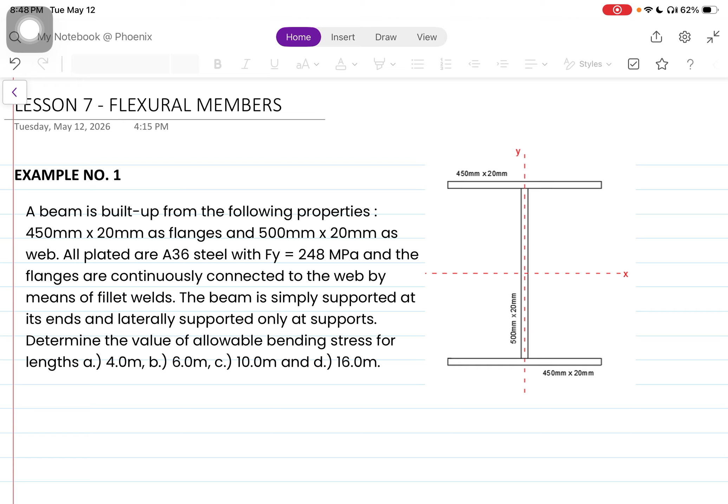This is our built-up section. We have 450 by 20 mm for the two flanges, one on top and one on the bottom. And we also have the web as 500 by 20 mm.

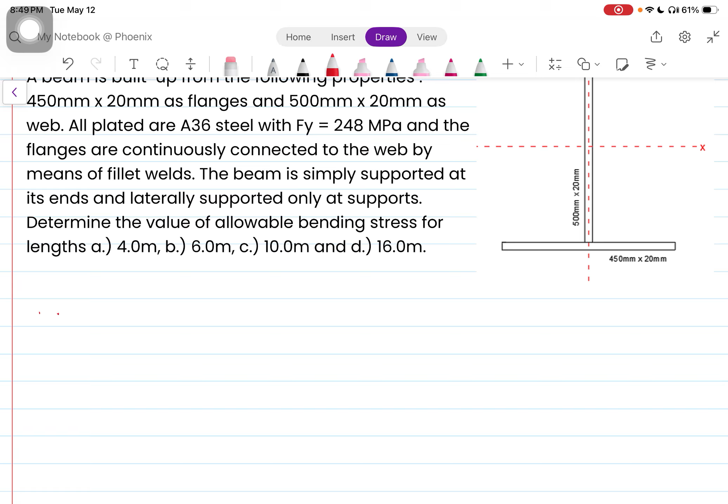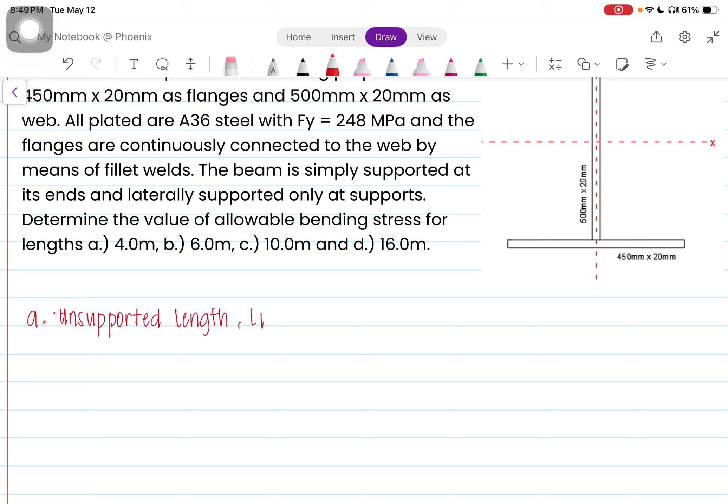So first, let's start with our first case. The unsupported length, Lb, is equal to 4.0 meters, or let's use it in mm, 4,000 mm. So what is our first step?

The first step is the compact check. Let's do the compact check first for the flange.

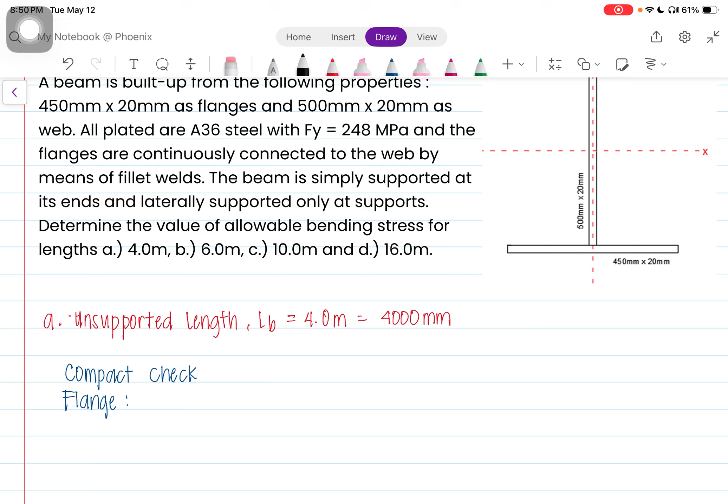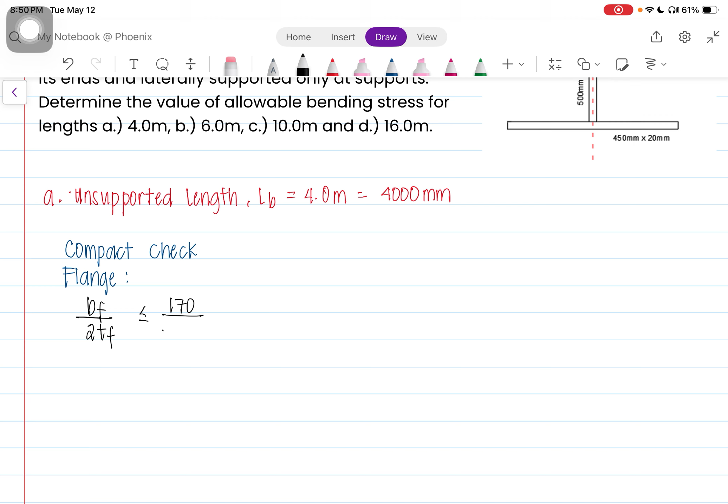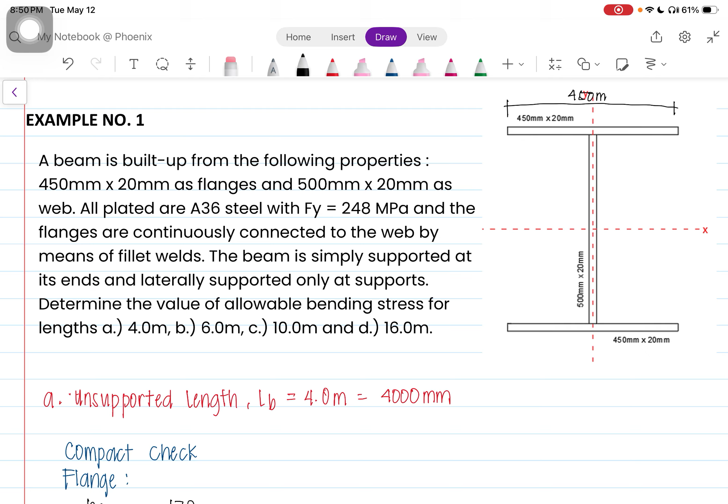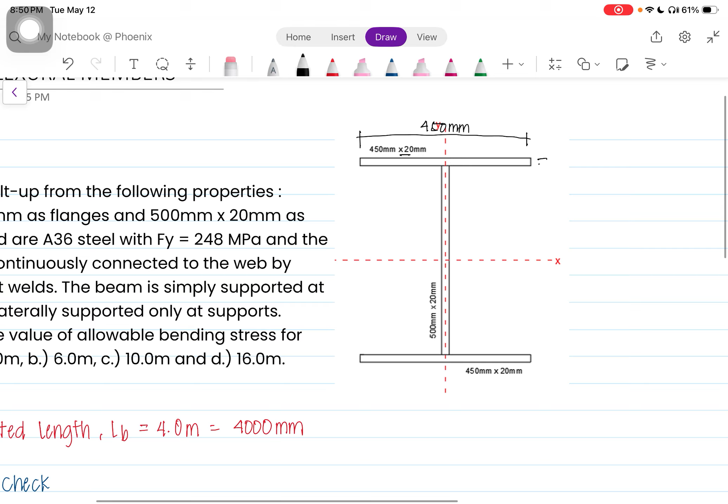We have BF over 2TF, and this should be less than or equal to 170 over square root of Fy. What is the base of our flange? That is 450 mm. So we have 450 mm over 2 times the thickness of the flange, which is given as 20 mm.

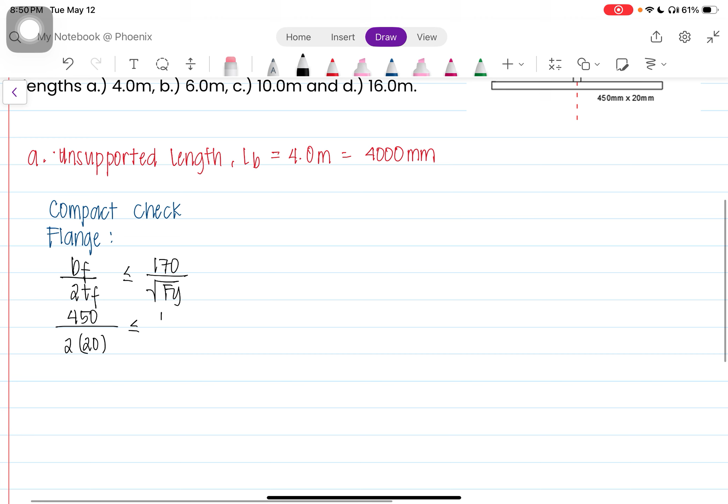So 2 times 20, and then we have to check it against 170 over square root of Fy. What is the given Fy? That is 248 megapascals.

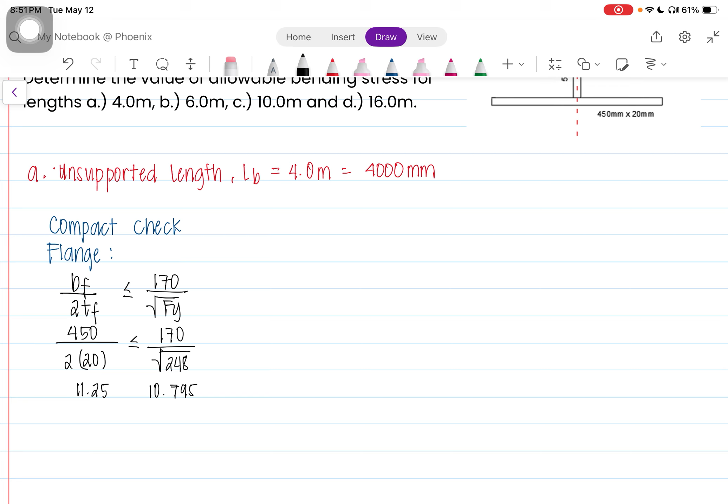Let us solve this. The value we get on the left side is 11.25, while on the right side it is 10.795. We did not get the right side to be greater — it's the left side that is greater. So this means it is non-compact.

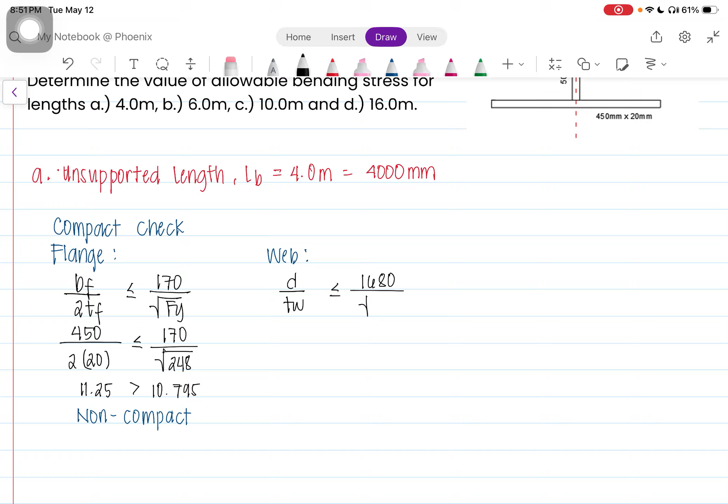It's not compact. Now let's check the web. Using the web, we have D over TW, and we check it against 1680 over square root of Fy. What is our depth?

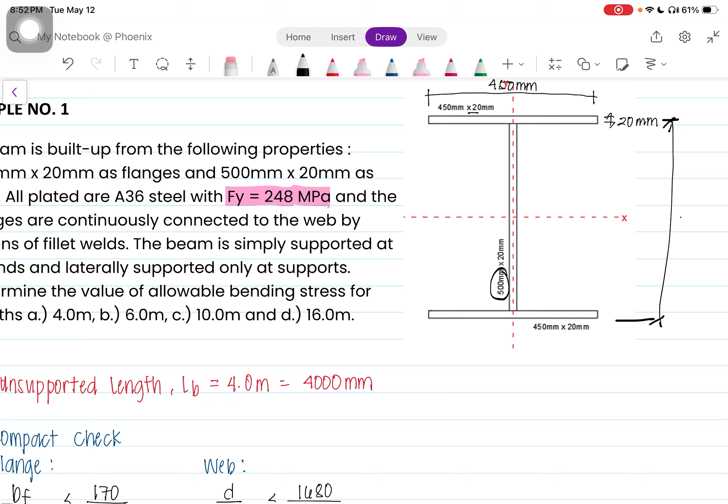Take note that what we need here is the total depth, from the extreme fiber of the flanges. We only have 500 for the height of the web alone, but what we need is from flange to flange. So the height of the web is 500, while the thickness of the flanges is 20 each. Since there are two, we now have 540 mm. So our depth is 540 over...

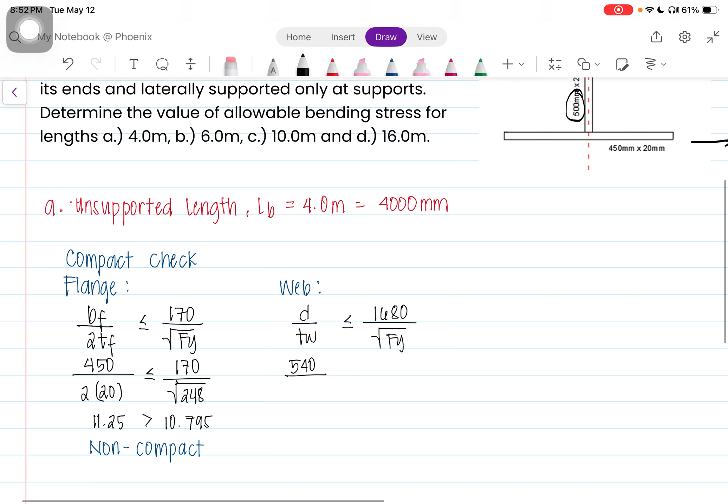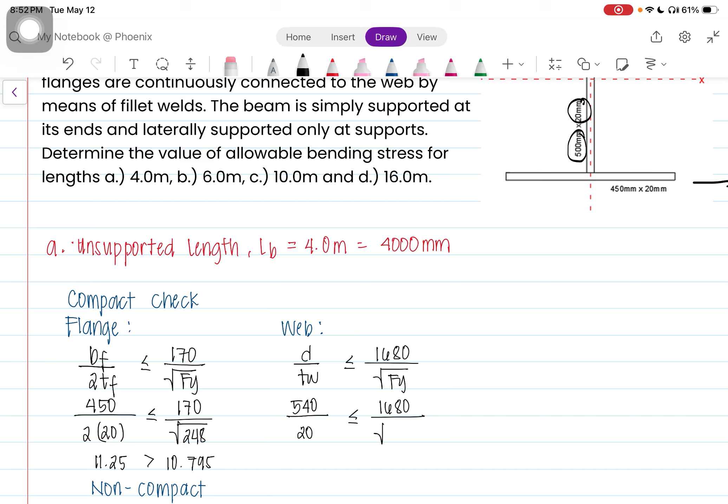What is the thickness of the web? The thickness of the web is 20 mm. We check it against 1680 over square root of Fy, which is 248.

Let us solve the left side — we get 27. On the right side, we have 106.680. That's a big difference, so we get compact. So only the web is compact; therefore we can say that our section is a partially compact section.

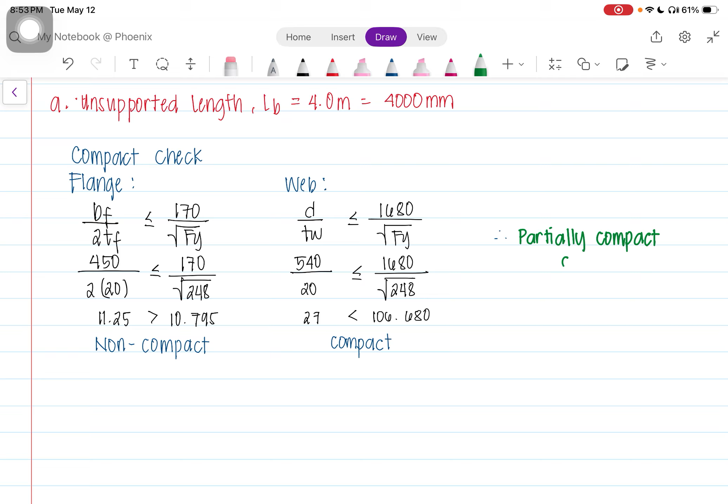Since it is not fully non-compact, we still proceed to step 2, where we have to check if it is laterally supported. So how do we do that?

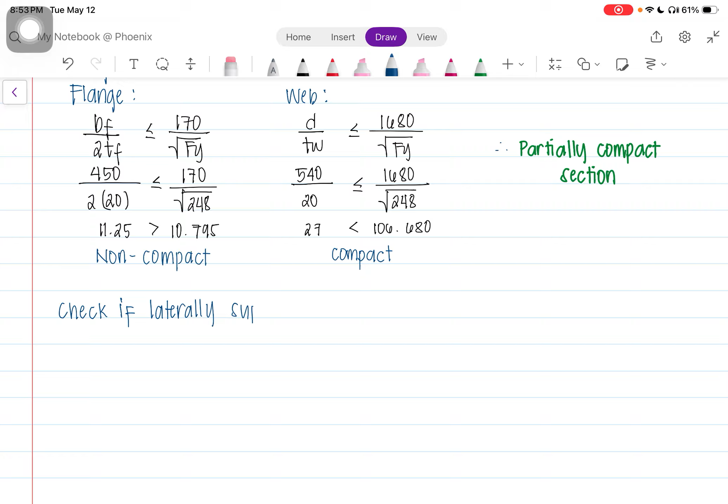We have to check for L1 and L2. Using L1 first: L1 is equal to 200 BF over square root of Fy. We have 200 times the base of our flange, which is 450, over square root of our Fy which is 248.

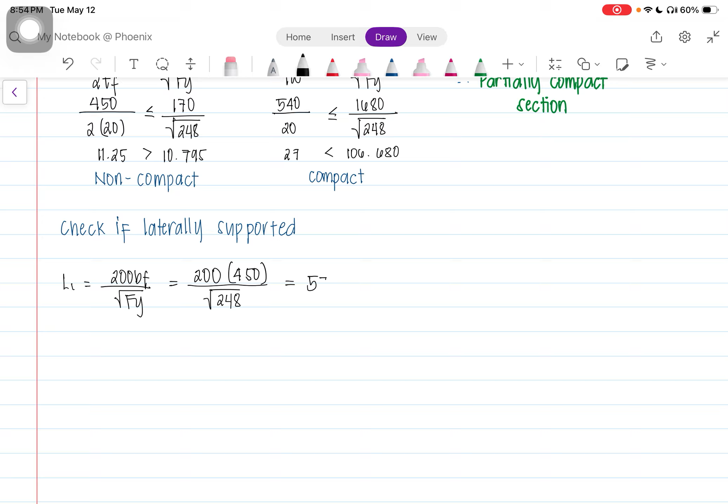The value we get here will be equal to 5,715.006 mm. Now let's check L2. To check L2, we have 137,900 over...

FYD over AF. We have 137,900 divided by our Fy, which is 248, and what is our total depth? That is 540, divided by the area of the flange.

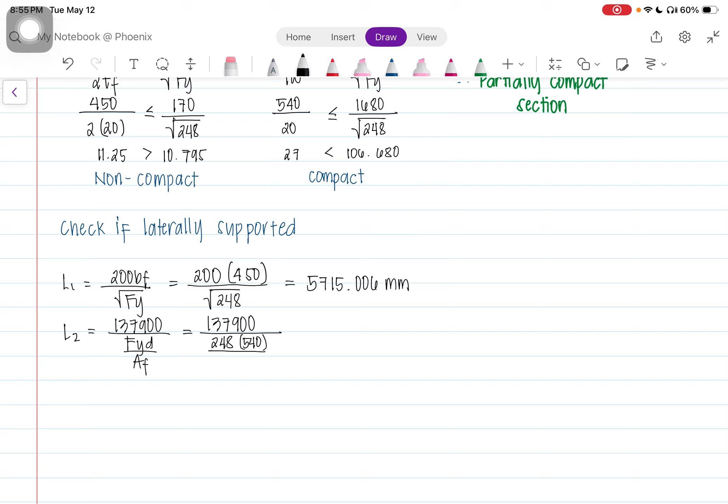The area of the flange — let's get that too — is 450 times 20. The value we now get for L2 is 9,267.473 mm.

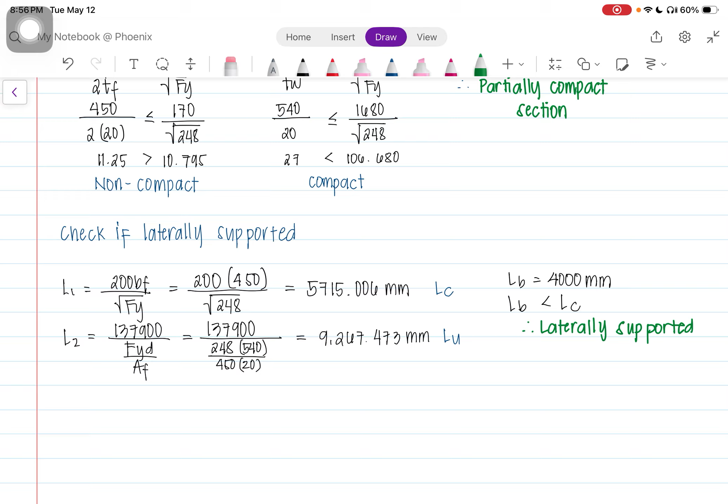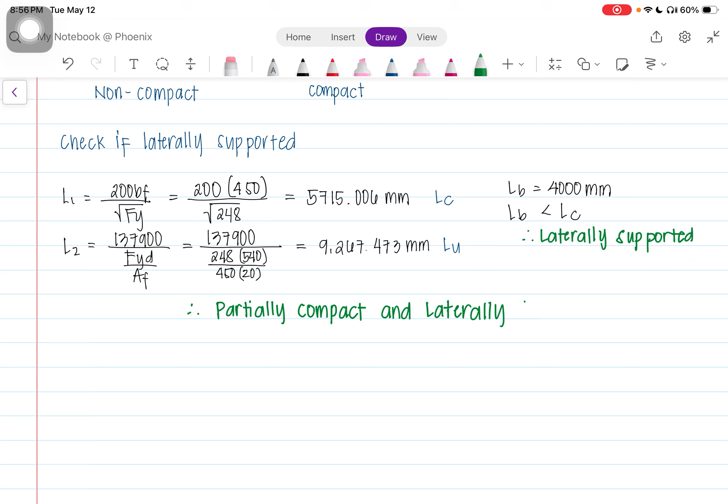So mas mataas kasi siya, 'di ba? So saan na nga magpo-proceed ito? Meron tayong nangyari sa section natin at sa member natin, it is partially compact and laterally supported. So ibig sabihin, ang gagamitin natin na formula para sa FB natin ay

FB is equal to Fy multiplied by 0.79 minus 0.000762 BF over 2TF, multiplied by square root ni Fy.

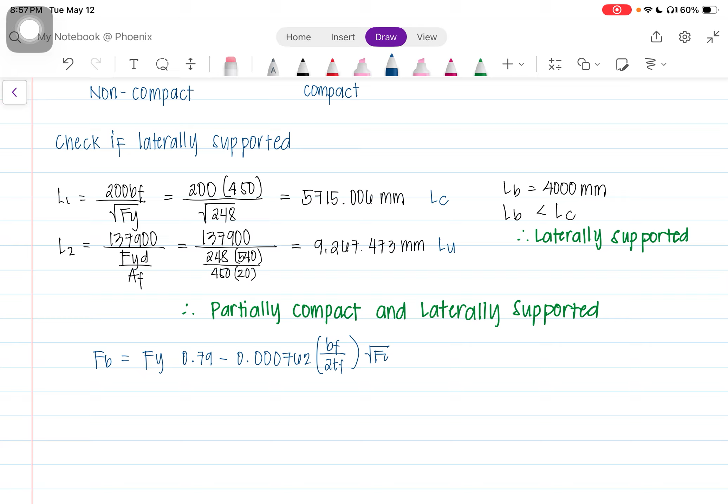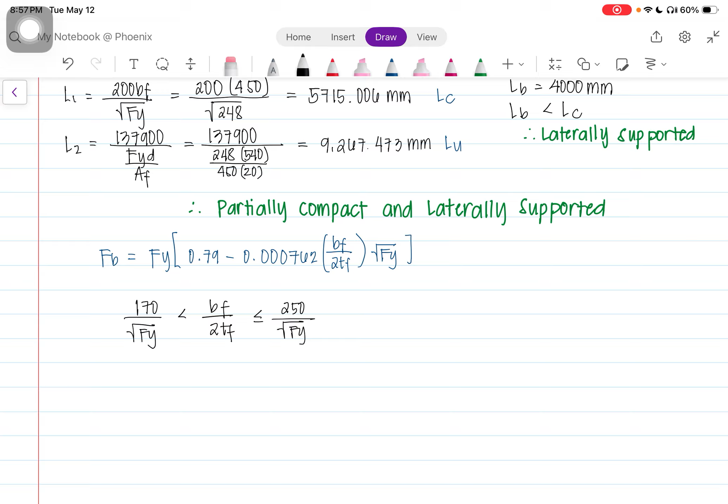Okay, so ito. But again, provided that, meron yan na kailangan muna nating i-check if 170 over square root ni Fy is less than sa ating BF over 2TF, and this should be less than or equal to 250 over square root ni Fy. Diba kanina nakuha na natin si 170 over square root ni Fy and that is 10.795.

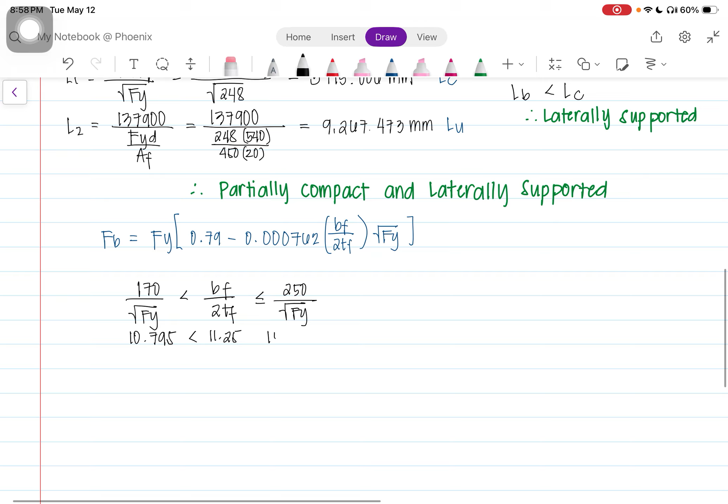At itong BF over 2TF natin, nakuha natin siya as 11.25. So napatunayan na natin na mas mataas siya. Ngayon let's solve for 250 over square root ni Fy, ang makukuha is 15.875, and which is that is greater than. Ibig sabihin nasa gitna. So okay ito, pwede na tayong mag-proceed dito sa may formula niya.

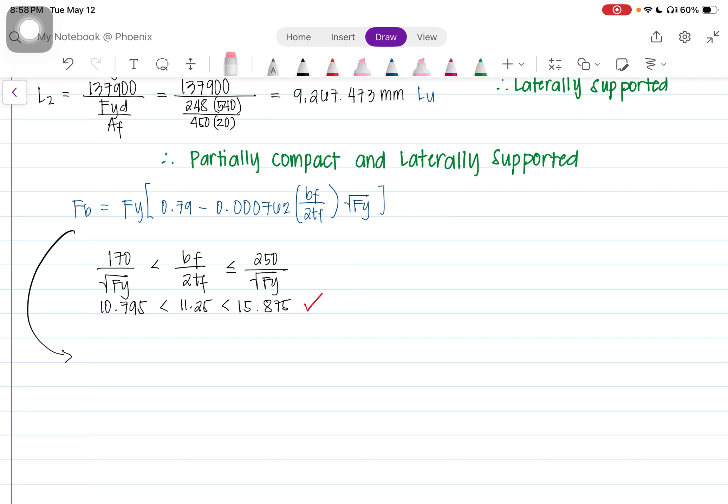Okay, so proceeding here, gamitin na natin yun. Solve na natin, o i-substitute na natin yung given. We have Fy, what is the value of Fy? That is 248, multiplied by 0.79 minus 0.000762 multiplied by, ano ba, si BF over 2TF.

Di ba ito na yung nakuha natin, sakto naman si 11.25, so yan na yung gamitin natin. Then we multiply it by the square root of 248. So with this, ang makukuha natin na value ng FB ay equal kay 162.440 megapascals. Okay, naka-megapascals na yan, kaya wala na kayong dapat pang i-divide na 1,000 o i-multiply na 1,000. Since we are talking about the stress, ibig sabihin ito na po yung ating final answer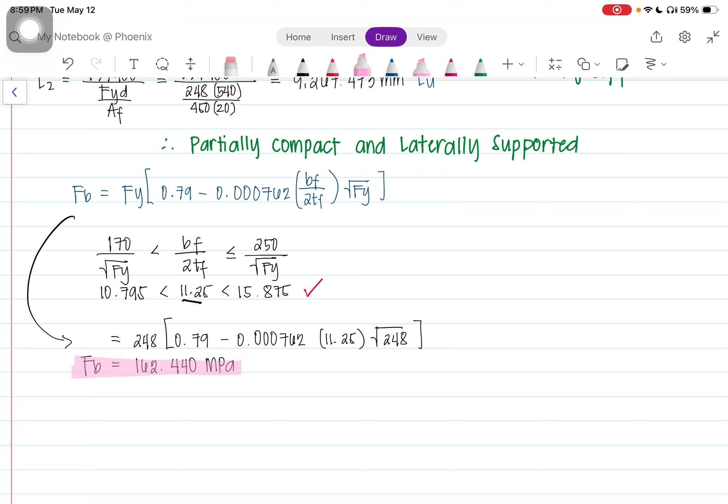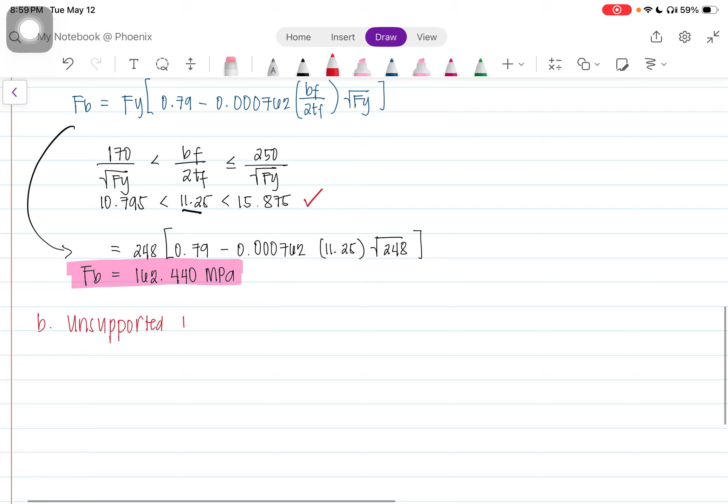for letter A, if your unsupported length is 4 meters. Puntahan naman natin ngayon yung pangalawa. If unsupported length is equal naman kanino? So LB is equal to, ano kasunod natin dito? We have 6 meters, 6 meters or this is 6,000 mm.

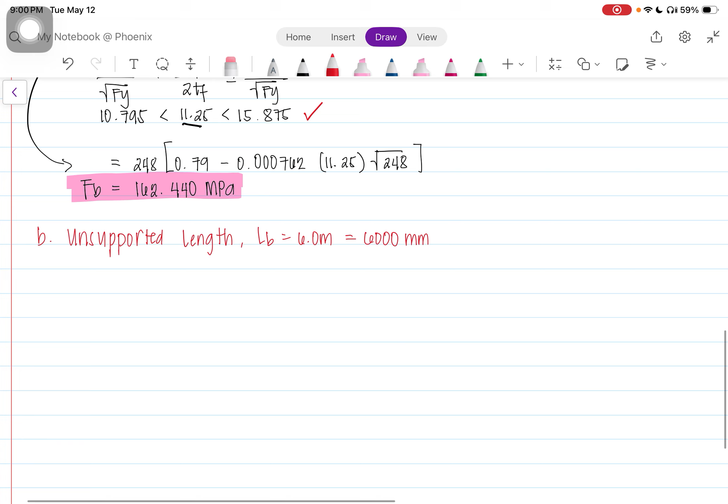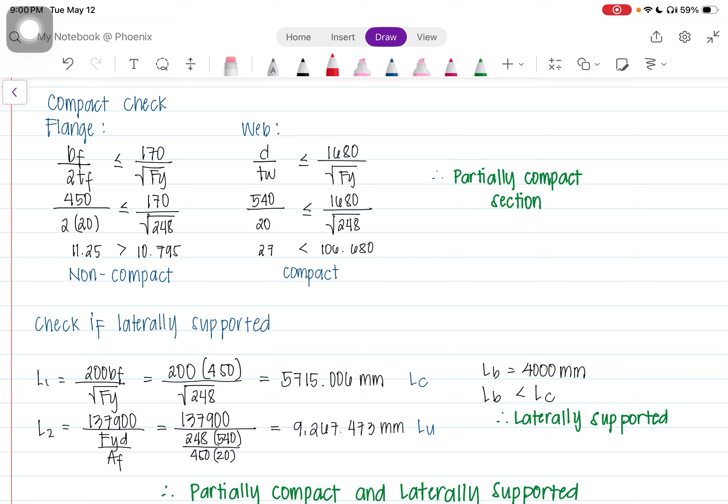Okay ngayon, ang tanong, diba sinimulan natin sa compact check. Si compact check ba, magbabago ba? Mababago ba yung BF, yung TF, yung depth, then yung ating web, thickness ng web? Diba hindi? Ibig sabihin hindi mo na kailangan ulitin pa yan. Alam na natin na this is partially compact section. Okay, so nabawasan na tayo.

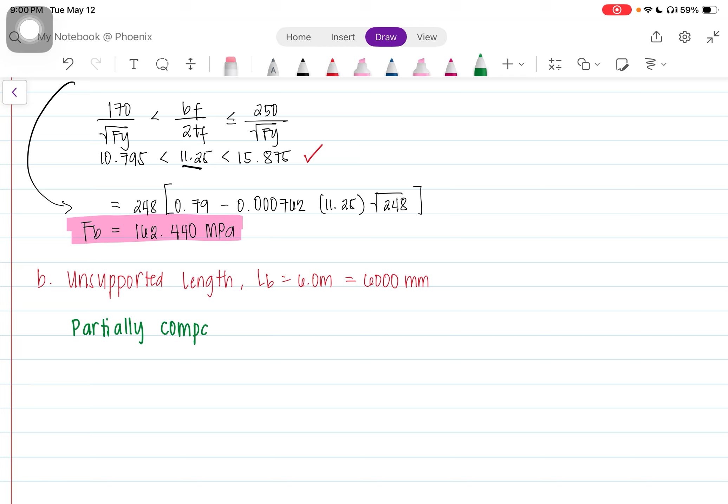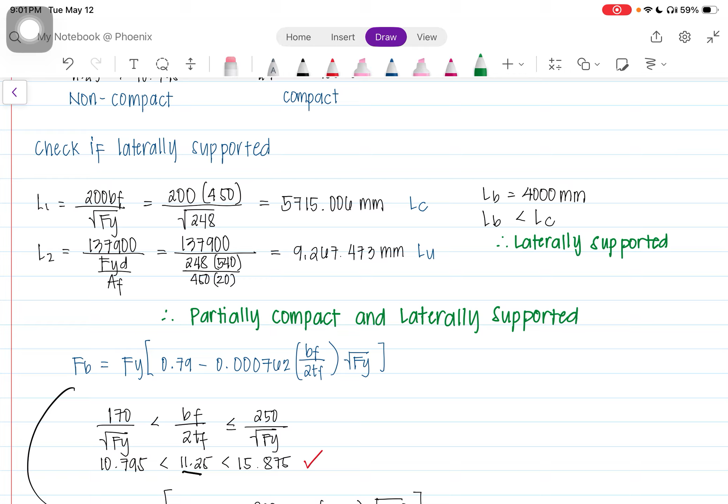O, next naman natin, si L1 at si L2, magbabago ba? Hindi, diba? Kasi again, hindi naman natin ginamitan si L1 at si L2 ng value ni unsupported, kasi yung si unsupported ang pinagbabasihan natin. So therefore, we have to check na lang if, ano ba si LB? Mas mababa ba siya kay LC? Nasa pagitan ba siya ni LC at ni LU? O mas mataas siya kay LU?

Okay, so sabi natin, LC is equal to 5,715.006 at si LU naman natin is 9,267.473, pareho silang mm. At si LB natin ngayon ay equal kay 6,000. Okay, so tignan natin, upon observation, si LB daw ay greater than kay LC but less than kay LU. So ano ibig sabihin nito? This is partially laterally supported. Tama, so partially laterally supported.

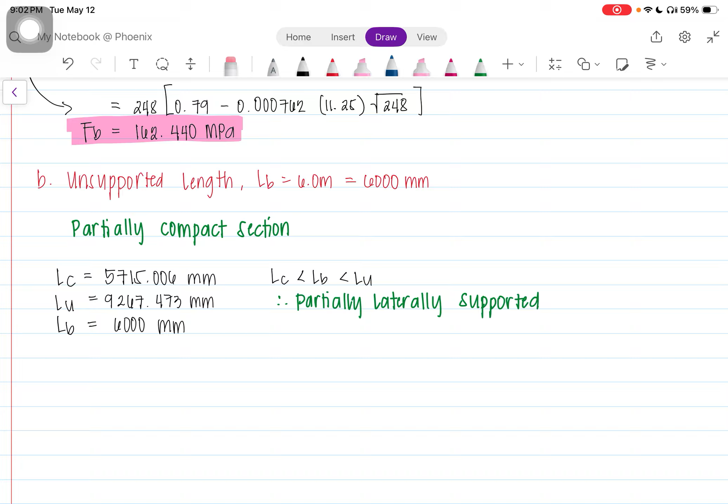So therefore, ang gagamitin na natin na value ni FB ay equal kanino? FB is equal to 0.6 Fy. Okay, kasi diba si 0.66 is compact section and laterally supported, so since this is partially compact section and partially laterally supported, ito na lang yung gagamitin natin, 0.6 multiplied by Fy. So pinakamadali, we have 0.6 times 248.

At ano ang makukuha nating value ni FB? That is 148.8 megapascals. And that is now your final answer. Okay?

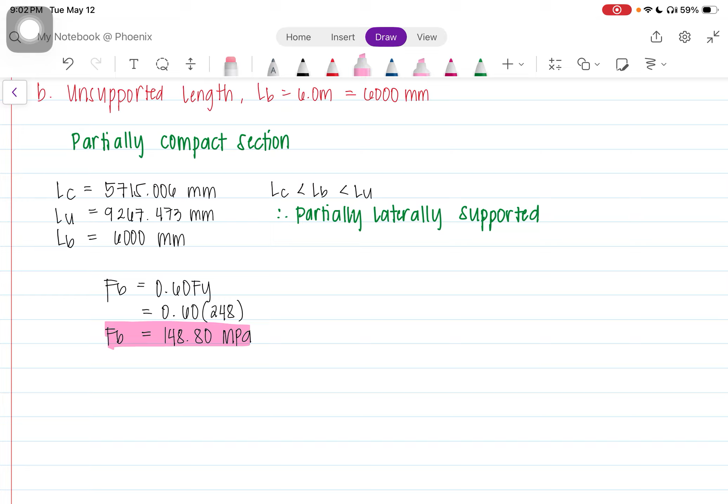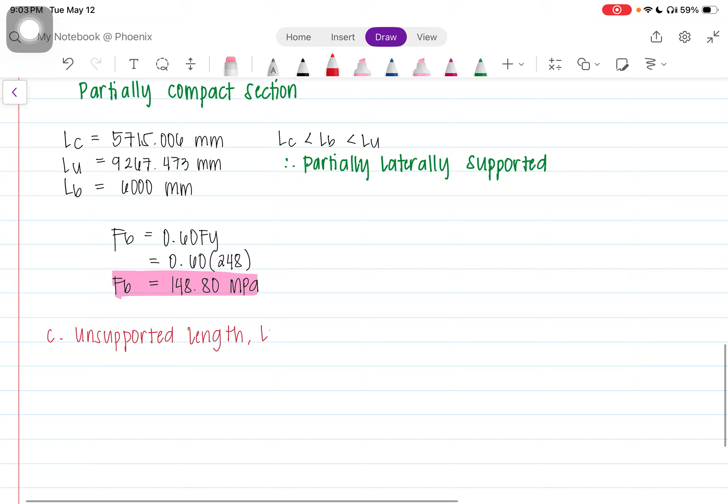Next, what if, okay, so the unsupported length naman daw natin ay unsupported length LB is equal kay, check natin, we have 10 meters, 10 meters or this is 10,000 mm.

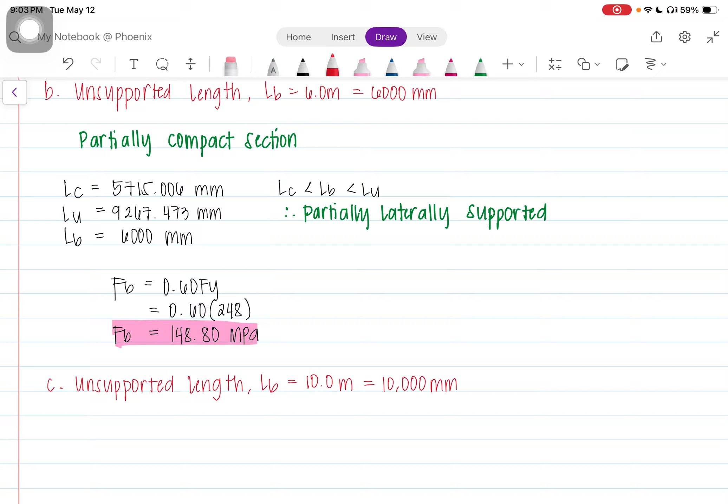Okay, so again, that is a partially compact section, wala nang magagawa doon, di na yan magbabago. Check na lang natin ngayon si LB. Si LU natin is 9,267. So kung mapapansin natin, 10,000 is greater than 9,267, right? So therefore, ang nangyari pala sa atin is that si LB ay greater than kay LU. So ano ibig sabihin nun? That is laterally unsupported.

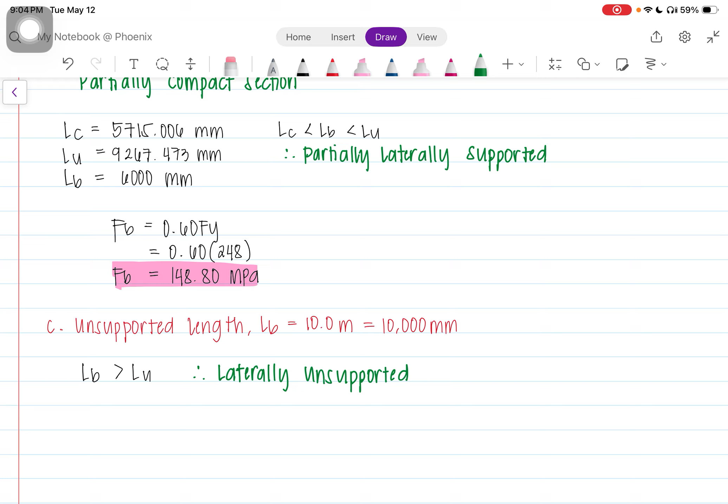Okay, ito pinakamabigat, diba? Kapag napunta siya kay laterally unsupported, you have to check the beam if it is intermediate or long. Okay, so ang gagawin natin, check if intermediate or long beam.

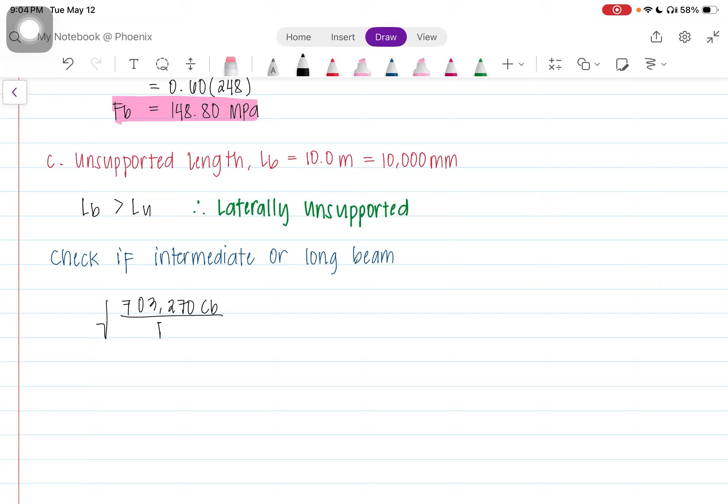Okay, so using what? Using the provision or the condition of the square root ni 703,270 CB over FY, and then comparing kay L over RT, comparing kay 3516330 CB over FY.

Ngayon, si CB, kailangan ba natin siyang isolve? Okay, hindi na, why? Kasi hindi naman binigay sa atin yung mga moment values, right? So ano pang sosolve natin doon? Hindi natin alam, hindi natin alam kung ano yung direction. So therefore, si CB natin dito is just equal to 1.

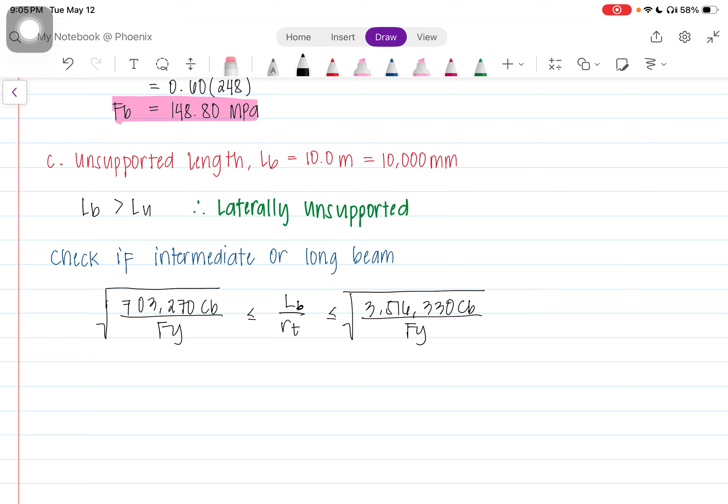Then si FY given na sa atin. Si L na gagamitin nyo dyan, that is the lateral, the unbraced length, okay, si LB. Ngayon, ang wala na lang tayong value is value ni RT, so kailangan pa natin isolve si RT. Okay, how do we solve now for RT?

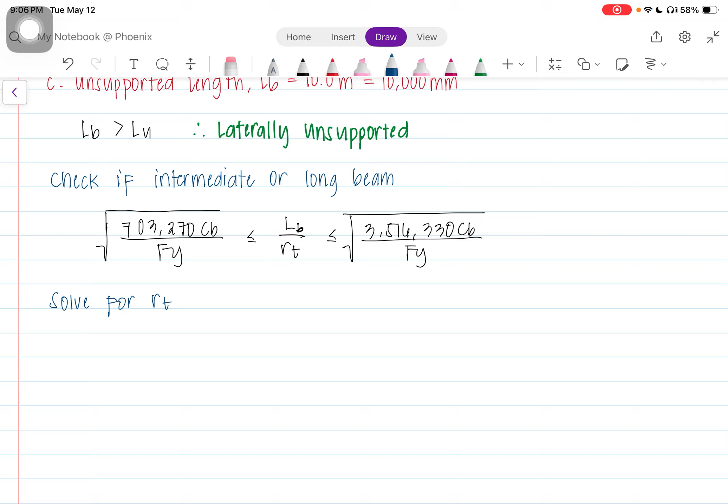So again okay, so let us solve for RT. So again, sabi nga natin, diba, si RT daw po ay compression flange plus 1/3 of the compression web. Okay, diba, ito yon sabi natin.

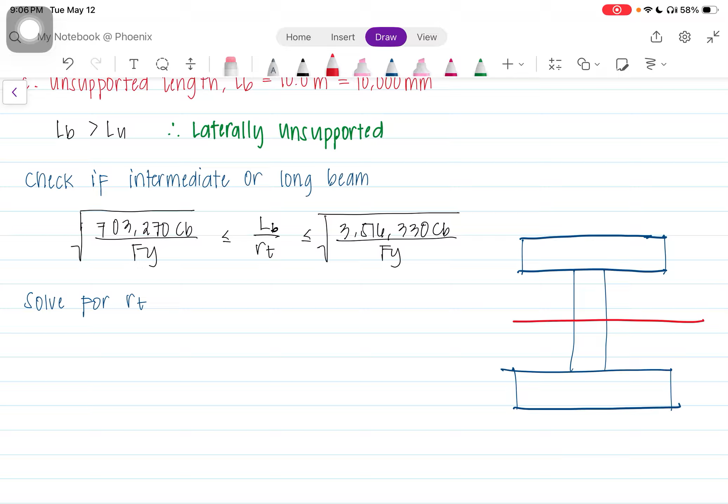So, meron tayong given, ito siya. So, ito yung ating neutral axis. Here is your neutral axis. Ang kailangan lang natin is the compression flange, ito siya. And then, 1/3 lang daw ng ating compression web, so this one, 1/3 lang nito.

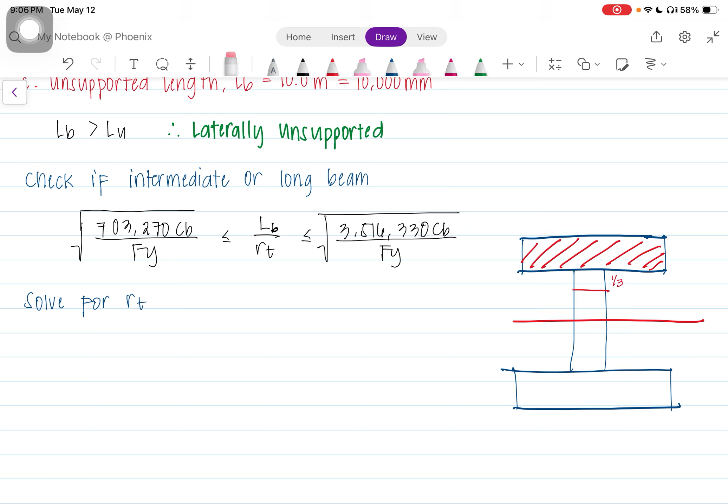Okay, ngayon lagyan natin ng labels. So sabi natin, our base of the flange is, balikan lang natin, 450, diba? So this is 450. And then, the thickness of the flange is 20. Then, the thickness of the web, ano yung thickness ng web natin? That is also 20. Ngayon, ang kailangan lang natin is the 1/3.

Okay, diba yung buo daw ni ito ay 500, tama ba? So ngayon, kung kinalahati mo yan, pag kinalahati natin, that is 250. So ang kailangan mo na lang kuhanan ng 1/3 is yung 1/3 ng 250. Very good. Okay, so yan na yon, yan lang yung kailangan natin, itong part lang na yan.

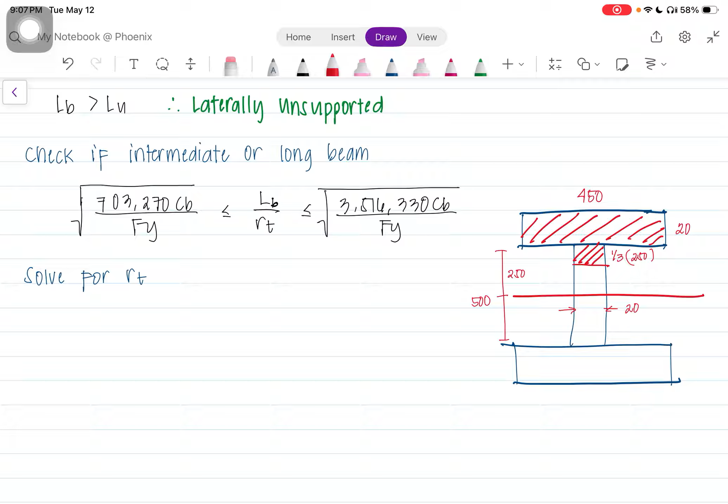Okay, ngayon pag nagsosolve tayo ng RT, take note, kailangan yung kuhanin yung inertia. Diba? So kung ganyan ang nangyayari sa atin, magkakaroon pa tayo ng, diba ang formula natin sa ating I, okay?

Kuhanin muna natin saglit si AT, o solve muna tayo kay AT. So yung AT natin dito na total area, but AT na lang na maliit. Okay, kailangan lang natin kuhanin dyan is the flange and then the 1/3 of the web. So that is 450 times 20 plus yung ating 1/3 ng compression web, that is 1/3 ng 250 multiplied by 20. So ano makukuha natin? AT is equal to 10,666.667 mm squared.

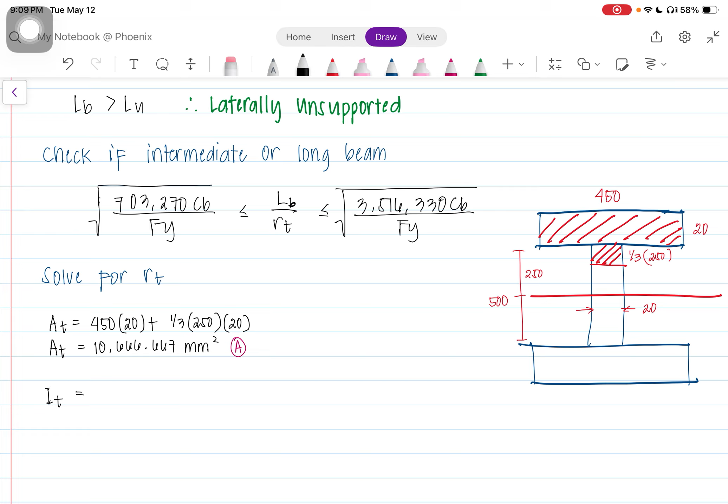Okay, iano natin ito? Store natin kay A, o, para hindi tayo magkakaiba kasi syempre diba mahaba din 'to. Okay, next naman natin, we have to solve for our IT. Okay, ngayon si IT, diba, ang formula natin kasi diyan is summation of IX plus AD squared. So kapag ganyan ang nangyari sa atin, masyadong madiwara. Why? Kailangan mo kumuha ng area, pinapahaba pa niya. Diba? Pero, halimbawa, gawin natin itong naka-shade na ito. Imbis na nakatayo, gawin natin siyang nakapahiga.

Pinahiga natin, yung parang ginagawa natin sa ating channel. Diba ang nangyayari dyan, kapag gano'n na hinihiga mo, nagkakapalit si IX at si IY, right? Pero kung mapapansin ninyo, pag hiniga natin yan, at nandito yung ating x-axis, okay? E di, ito yung gitna, ito yung gitna ng web, ito yung gitna ng ating compression flange. So, ibig sabihin, mawawala na yung ating AD squared, diba? Kasi wala tayong makukuha value ni D. So ibig sabihin, ito na lang yung kailangan natin, si IX na lang.

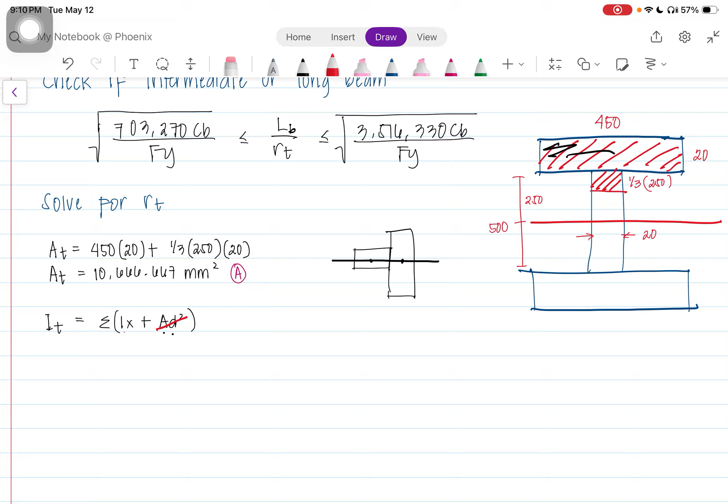So yan po yung isang strategy din pagdating sa pagkuha ng IT. So pwede mong ihiga yung inyong compression, yung pang compression flange as well as the 1/3 of the compression web. So with that, since wala namang binigay na value ni IX, but we all know that I is equal to BH cube over 12, wala tayong problema. Okay? O, kuhanin muna natin.

Doon muna tayo sa may compression flange. So si compression flange, ano yung base niya? Mababago, ang base na niya ay si 20. At ano ang magiging height niya? That is 450 cube over 12. Then again, wala na tayong magiging AD squared since wala naman tayong mapakuha value ni D dahil mag-0 lang siya.

Plus, okay, o doon naman tayo sa may 1/3 ng compression web natin. Ano ang magiging bago nating base? So the base will be, ito yung 1/3 ni 250. So gawin na lang natin 250 over 3, multiplied by the height, and what is the height? That is the thickness, which is 20, cube over 12. So with that, anong makukuha nating IT? So si IT natin dito will be the value of 151,930,555.6 mm to the fourth.

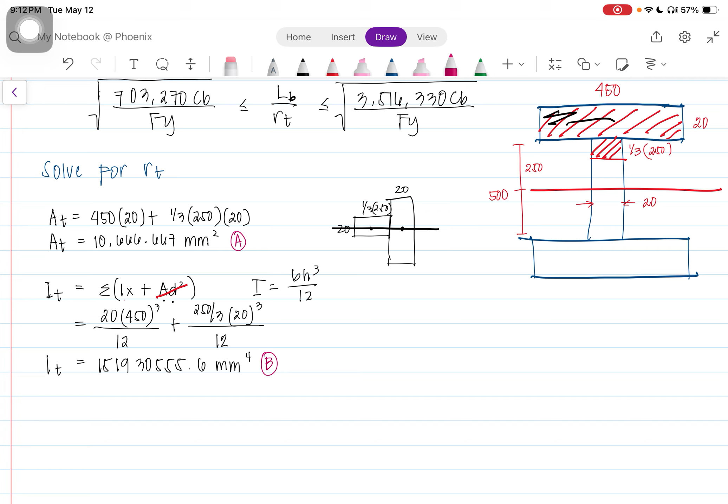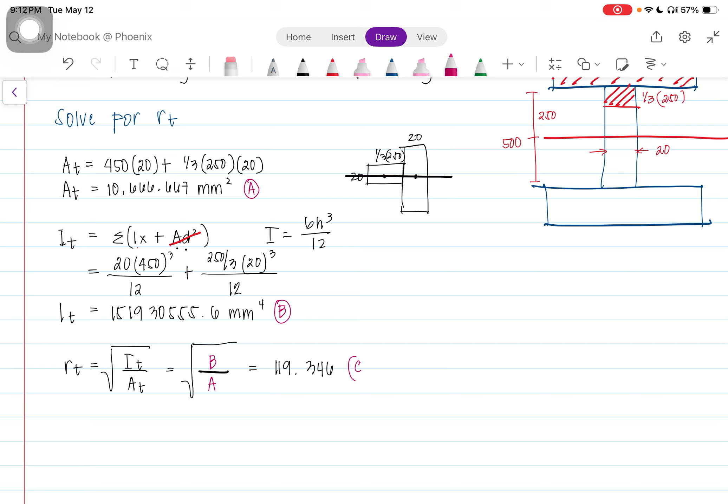So how do we solve for RT? Okay, again, RT is equal to square root ni IT over AT. Saan na nga si IT natin? Si IT ay nakay B at si AT naman ay nakay A. Okay, so with this, what will be the value of RT? The value of RT is equal to 119.346. Or store na lang natin kay C, okay? Para pare-pareho tayo ng kalalabasan.

So with that, pwede na tayong bumalik ulit sa ating condition. Okay, so solving this now, condition natin, square root ni 703,270. Ano si CB? Again, that is 1.0, over, ano si FY? Si FY natin is 248. Okay, i-check natin siya kay LB. Ano yung LB natin dito? This is 10,000 over. Ano si RT? Nakay C. And then i-check natin siya kay square root ni 3,516,330. At si CB natin dito ay 1.0 lang divided by 248. Okay? So check natin, makukuha natin on the left side is 53.252. And then si LB over RT natin, ang makukuha natin is 83.79.

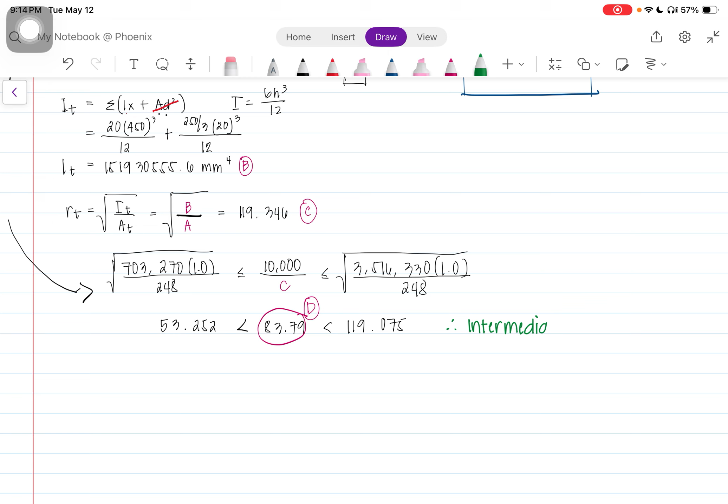Okay, for an intermediate beam, we will use FB1 and FB3. Let's check which is larger. We have FB1. How do we solve for FB1?

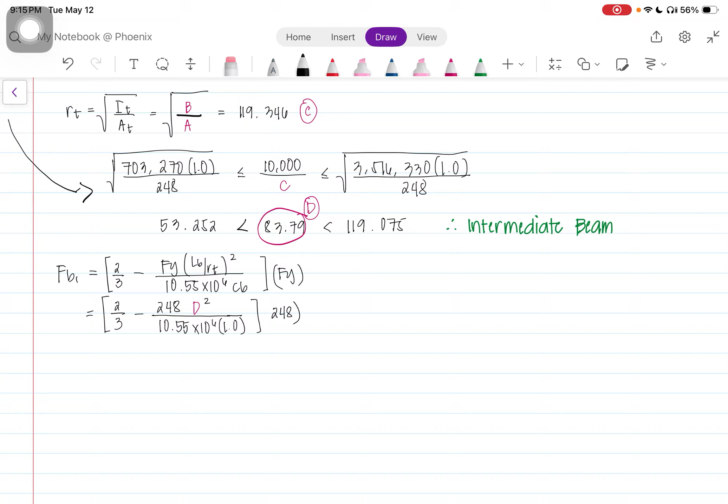FB1 is equal to 2/3 minus FY times LB over RT squared over 10.55 times 10 raised to 6 multiplied by CB, quantity multiplied by FY. Substituting the values, we have 2/3 minus, what is our FY? That is 248. And our LB over RT, stored at D. Squared over 10.55 times 10 raised to 6 multiplied by 1.0, quantity multiplied by FY of 248. So what do we get for FB1? FB1 here will be equal to 124.404 megapascals. So we can't consider this as the final answer yet.

We still have to check FB3. Let's get FB3. To solve FB3, that is 82,740 times CB over LD over AF. With this, let us substitute the given values.

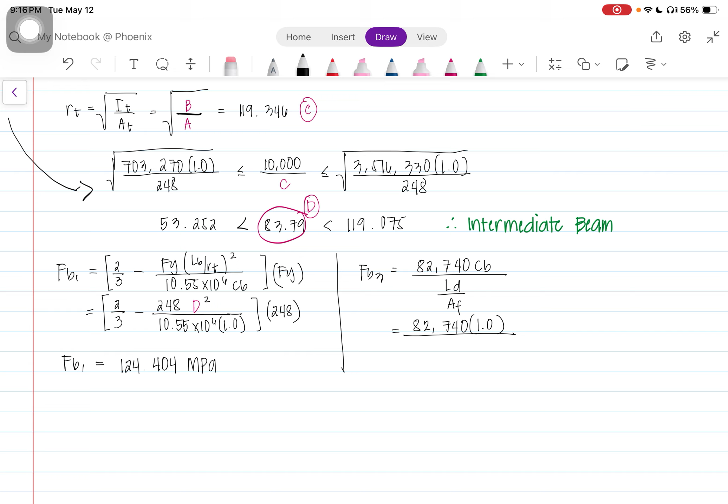We have 82,740 times CB, which is 1.0, over the length, which is 10,000. And D, the total depth, is 540, over the area of the flange, which is 450 times 20. And the value we get for FB3 is equal to 137.90 megapascals. So if we look,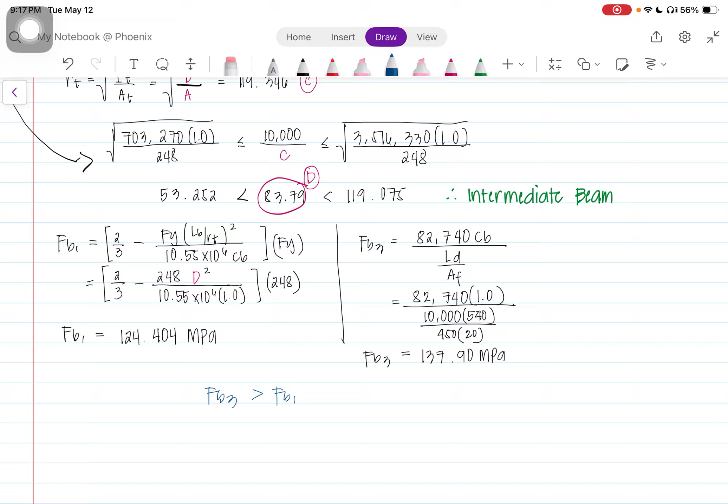FB3 is greater than FB1. But again, we can't yet say FB3 will govern. We still have to check 0.6 FY. Checking now for 0.6 FY, we have 0.6 times 248, which gives us 148.8, already computed earlier, in megapascals.

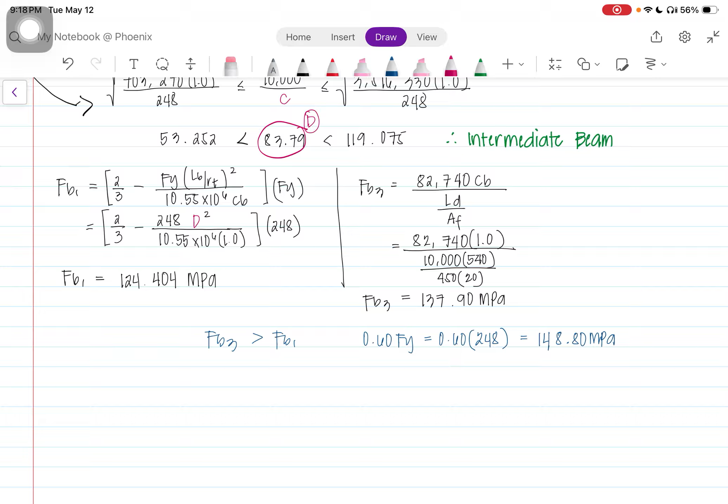Since FB3 did not exceed 148.80, we can now say, use FB3, which is equal to 137.90 megapascals. And that will now be your final answer.

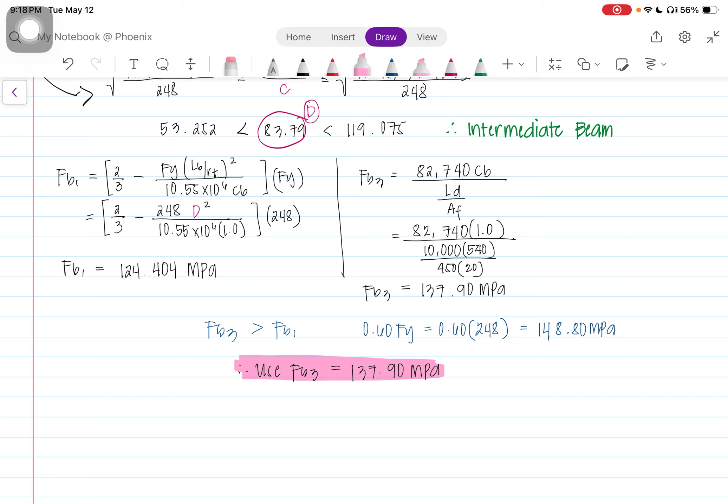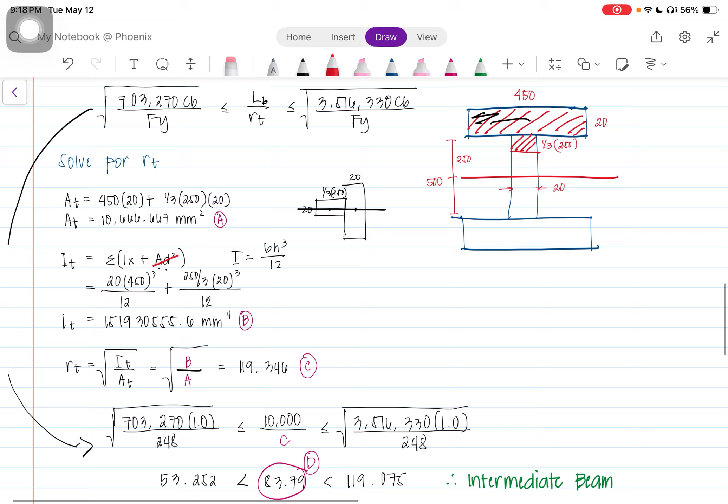Okay, so we are now done with the third, and let us proceed now to the last one. Unsupported length, what is our LB here? I think 16. Yes, that is 16 meters.

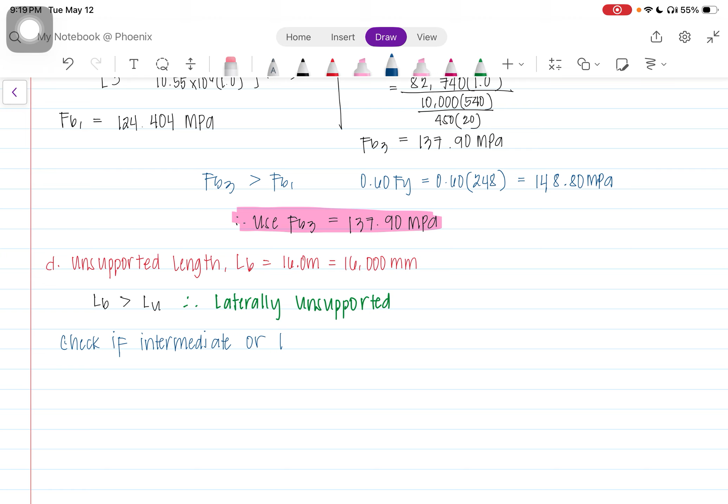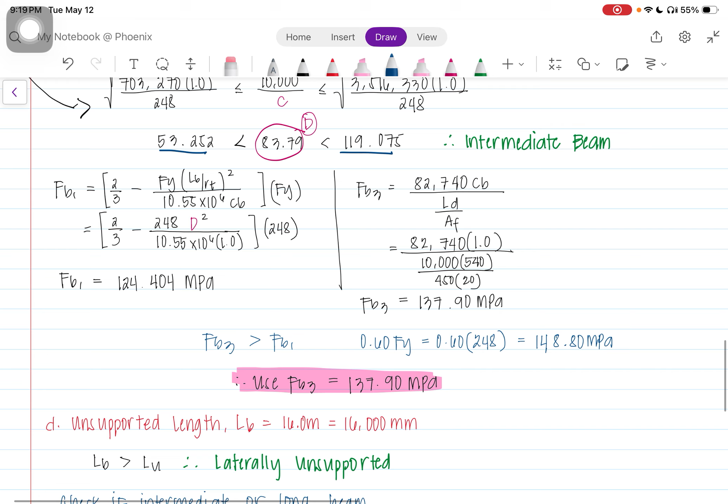So let's just get it. We have 53.252, and we need to check this against LB over RT. Then our right side is 119.075. With that, let's solve for LB over RT.

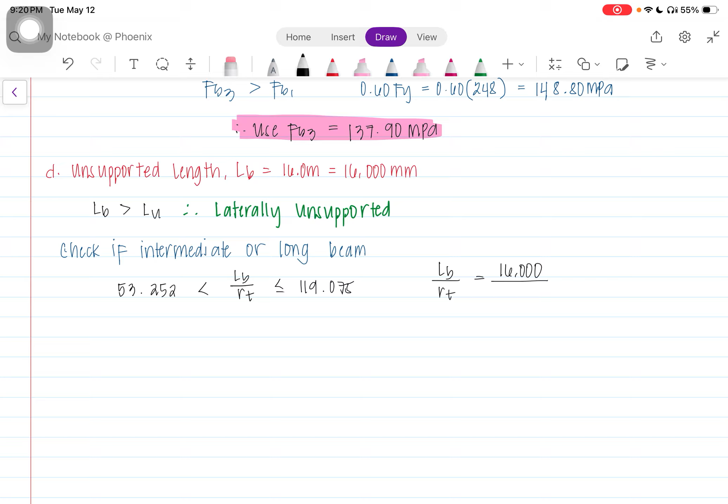What is our LB over RT? What is our LB? So here, LB over RT. Our LB is 16,000, over, what is RT? Stored at C. So with that, what do we get? LB over RT is equal to 134.064. Store that right away.

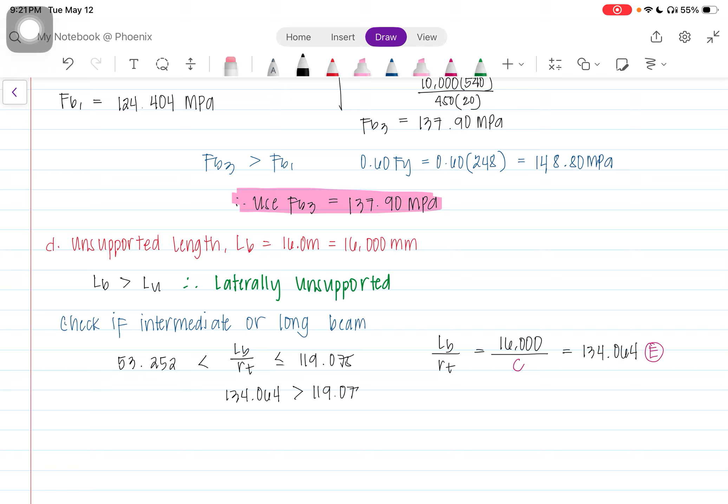Store it where? At E. So if we look, LB over RT is 134.064. It's higher than 119.075. So that means this is a long beam.

Long beam. So for a long beam, we will use FB2 and FB3. Let's use FB2. Using FB2, that is 1,172,100 multiplied by CB over LB over RT squared.

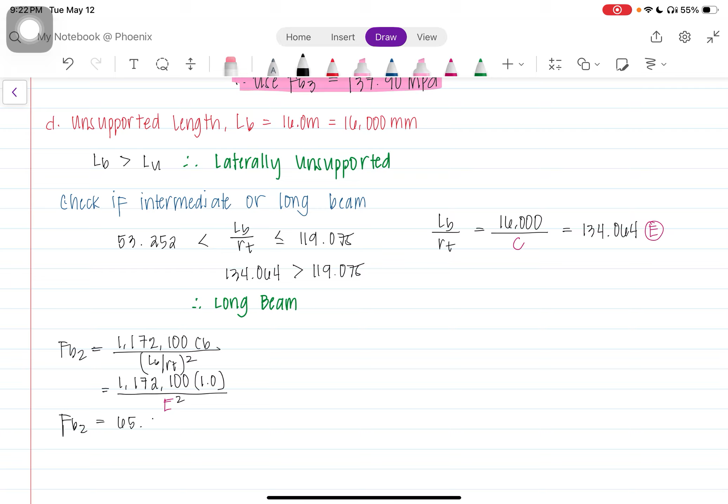Let's substitute the given values. What is CB? Yes, again that's 1.0 only. And our LB over RT, already stored at E, so that's E squared. Then what do we get for the value of FB2? The value of FB2 will be 65.214 megapascals. But again, that's not yet the final answer because we still have to check the value of FB3.

Using the same formula, 82,740 CB over LD over AF. Substitute the given values: 82,740 times 1.0 divided by, what is our L? L is equal to 16,000, the one we use. And D is 540 divided by the area of the flange, 450 times 20.

Then what will be the value of FB3? So the value of FB3 is equal to 86.1875 megapascals. So which is greater? FB3 is greater than FB2.

But we still have to check again 0.6 FY. Isn't 0.6 FY equal to 148.8 megapascals? So that means it's still higher. So therefore, our answer will be: use FB3, which is equal to 86.1875 megapascals. So with that, that is now our final answer.

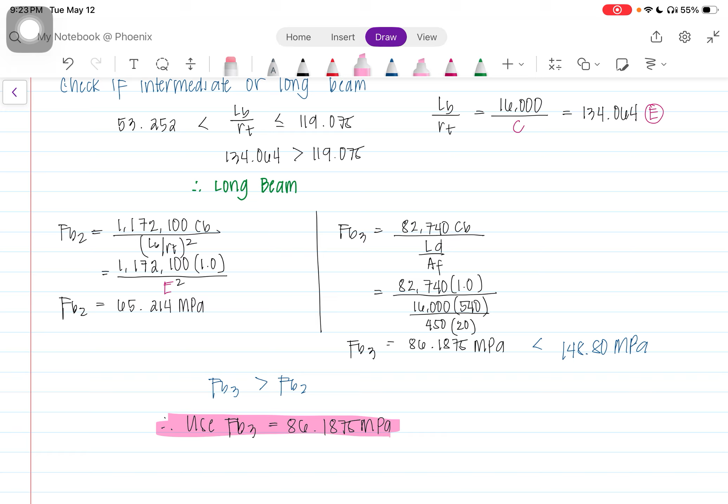Okay, so this is how we solve for flexural members. We tried laterally supported, we tried partially laterally supported. We also tried the long beam and then the intermediate beam.